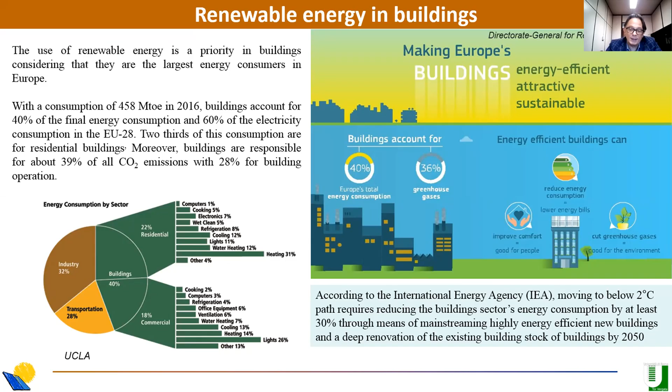So what is the idea? The idea is the following: we have buildings everywhere, more and more actually. The floor area used for buildings will increase at a steady pace in the next years. The idea is to create something active, a wall that could generate energy in the building, and then use that energy in the building itself.

So you also avoid the transport of energy and use the energy exactly in the place where you need it.

So, however, to do this, I mean, we need to... sorry, I need to move something here. Let me see if I can move something out. I cannot do. Let me see. Okay, maybe.

So anyway, there are several options to activate this process. I mean, of course, efficiency, color, stability are all important.

Transparency, if we want to use in glass facade, but also we need to motivate people to accept it. So we need to have a social acceptance of having a building element, an active building element. So also the norms, the rules should be changed, and this will also impact completely our societies. So it's not only a technological problem, but also it's a social problem.

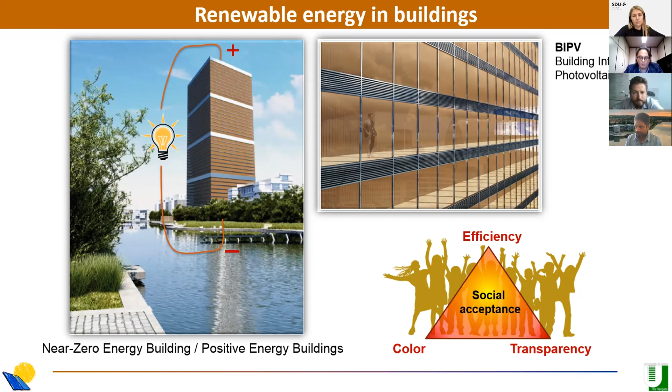Concerning photovoltaic technology for transparent photovoltaic, I will focus only on the transparent part of the building integration. Of course, you can integrate photovoltaics in buildings in different ways, also in the spandrel part, the opaque part of the building, or in the roof. I will only focus on the transparent part, which is the more advanced, more tricky, the more critical from the technological point of view. So there are several technologies to integrate photovoltaics in semi-transparent facade.

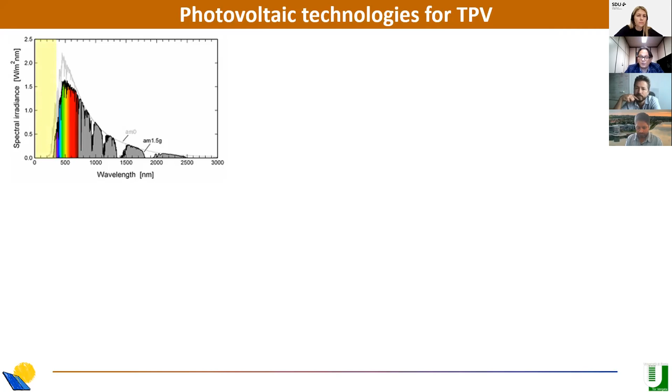For example, I show you the spectrum irradiance, the sun spectrum we receive on Earth. You can see that to make something which is transparent, but at the same time converts some light into energy, we can use, for example, the near UV part of the spectrum. So you have a near UV absorber. And in fact, there are already reports showing that you can use this part to make some cell with some efficiency and an average visual transmittance, AVT, of 70%, for example.

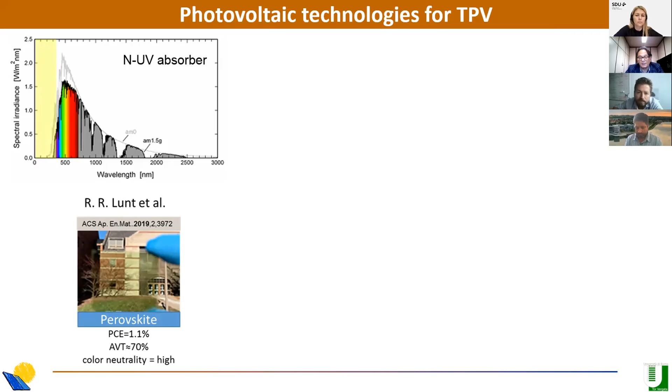Of course, you can do the opposite. You can use a near infrared absorber, and with that you can harvest energy in the infrared part, and there are several technologies that could do this. Of course, it's quite selective. Conventional semiconductor will absorb from infrared down to visible and UV. You need molecules, more or less, to have a selective absorption in the infrared only.

And for this reason, the two main technologies are dye solar cell and OPV, organic photovoltaics, both small molecule and polymers.

Now you can easily understand that you can combine both in a sort of tandem application, where you can absorb the UV part and the infrared part, and then harvest energy from both parts of the spectrum without touching or absorbing in the visible range.

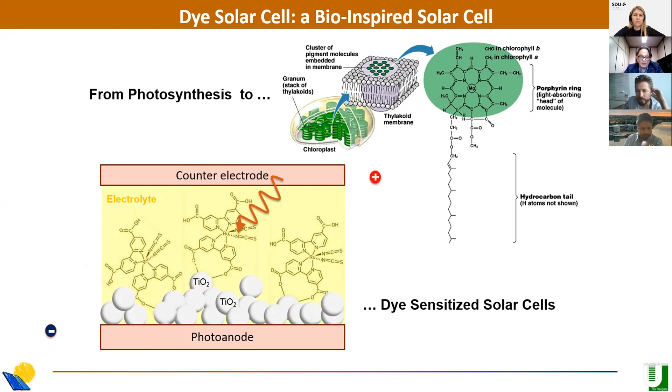So these results are from some years ago. There was an enormous effort and a breakthrough, I want to say, recently.

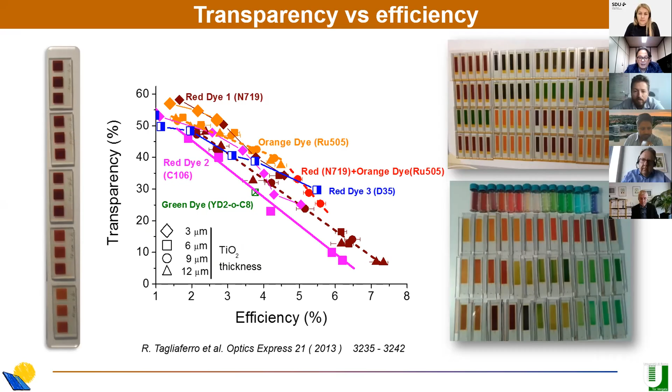This was made by the Fred Sauvage group, who were able to get almost more than 3% efficiency with a transparency in AVT exceeding 75%. So this was a very big breakthrough. The molecule was synthesized by Claudia Barolo in Turin, a near UV dye.

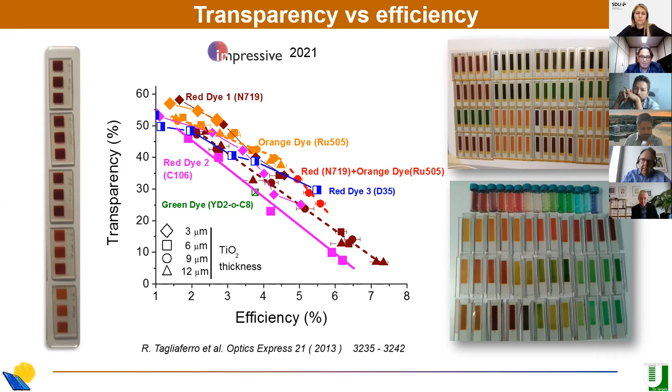Using also a very transparent electrolyte, they were able to get this result. So you see there is a continuous effort, a continuous innovation in the field, and this is pushing the ratio between transparency and efficiency. So at the very end, I believe in a few years we can move these numbers to higher efficiency, keeping the same transparency.

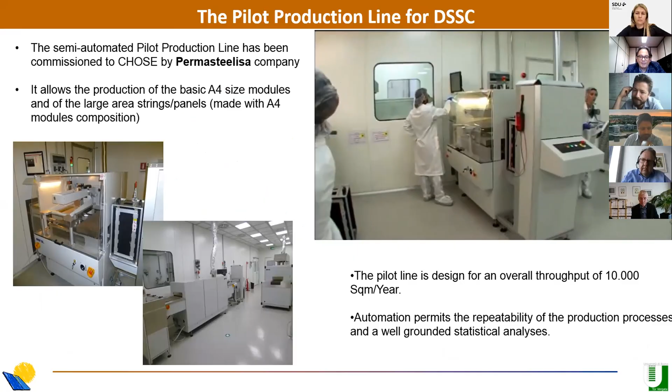So this technology is quite commercial, it could be exploited at the industrial level. Unfortunately it's still not commercial. But you see, this was an effort we did for a very big facade company called Permasteelisa. This is a semi-automated pilot line where modules could be fabricated more or less in an automatic way.

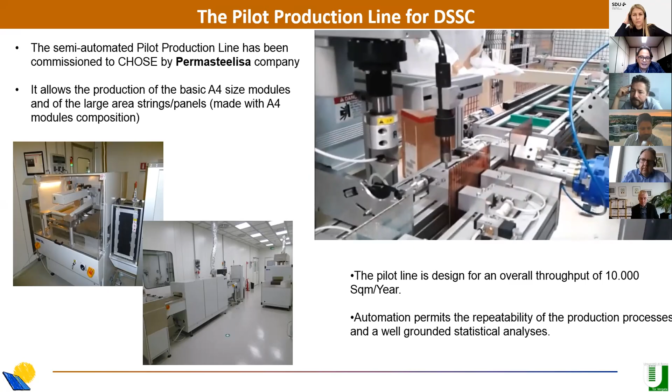You see here is the oven where you can sinter the titania. And then you see this is the final part of the assembly, and the robot that takes these modules and assembles them all together to make the final panel.

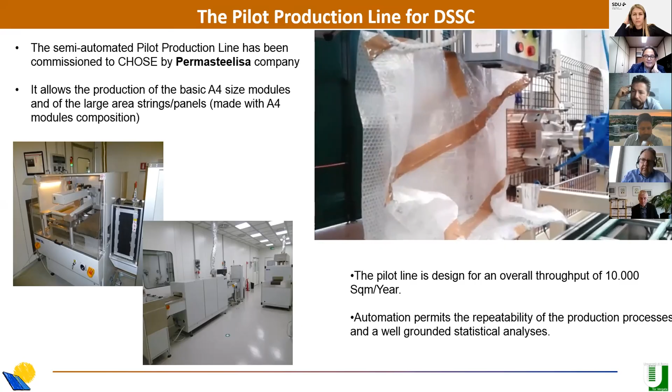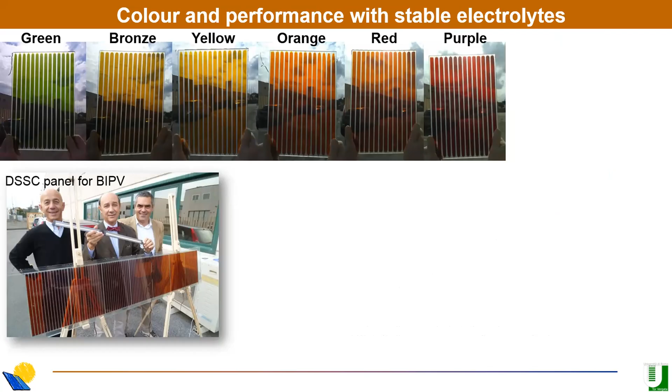This is more or less what you can get. It's not too transparent, but at that time we had some other milestones related to colors. You can change color more or less continuously from green to red. Still blue is a bit problematic. This is the typical value of efficiency, around 5.5% on the module level, and AVT around 30%.

Technology is quite rugged, robust. They can indeed sustain the IEC norm test. This, for example, is 85-degree thermal stress. It's not damp heat, but you can do also the damp heat test. And then you see you can keep the efficiency quite constant, even for 1,000 hours of stress. So even though the basic technology is a molecular technology, you can indeed stabilize this technology without a problem.

Of course, stabilization of the technology came after a big effort, an industrial effort made by more or less 20 people for 5 years. So it comes not for free, but it is doable.

The next step, actually, after the dye solar cell, was the introduction of perovskite, halide perovskite, and this was more or less motivated by the development made by the dye solar cell.

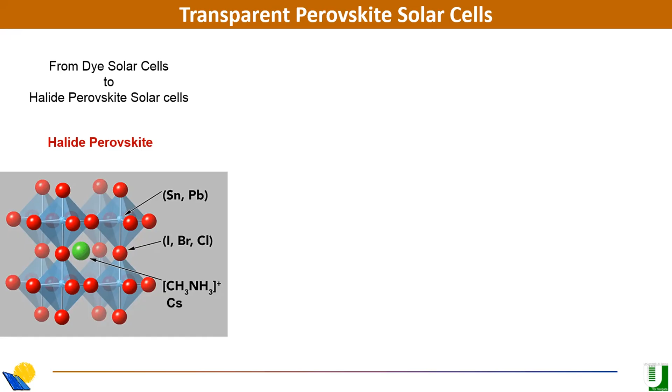Halide perovskite is a quite complex material, and you can see that you can change a lot of elements inside the crystal structure. One of the main elements is lead, which is sometimes problematic because it's lead. But then other elements, the halides or the other cations, can be changed to tune the properties of this material.

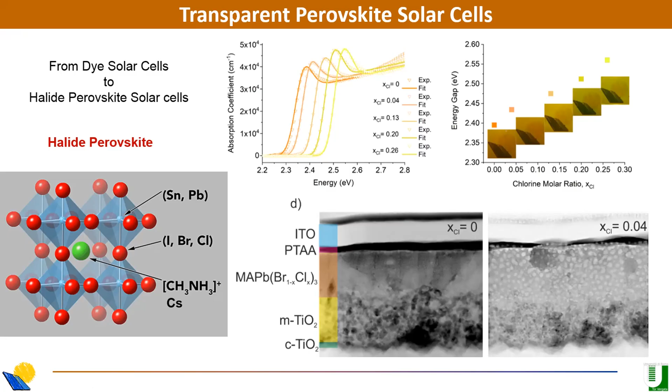So in the first plot, I show you the absorption coefficient as a function of the energy of the photon for different concentrations of chlorine. I'm now focusing on this kind of perovskite, methylammonium lead bromine chloride, because this kind of perovskite has a large gap for making a UV absorber. As you can see, changing the chlorine content, you can change the gap from 2.4 to almost 2.6 electron volt. So you are moving the gap toward blue or near UV.

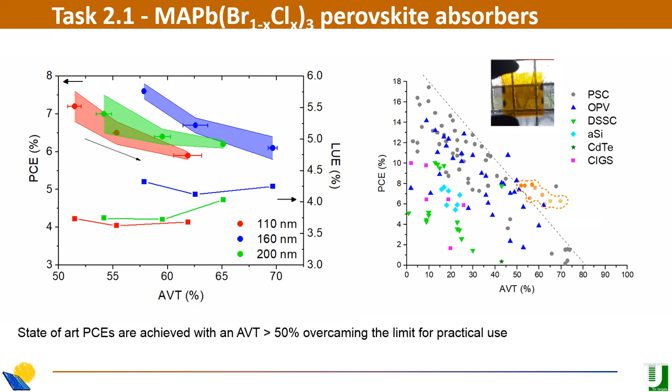This is the plot summarizing all the results published up to date in literature, showing efficiency and transparency. The results we recently obtained were in this range, quite overcoming the results published in literature so far. So it's a new strategy to get good transparency and at the same time good performance.

You can scale these up to large area. You can see here modules made by perovskite materials with different concentrations of chlorine, over a quite large area. And scaling up does not reduce too much the efficiency of the solar cell.

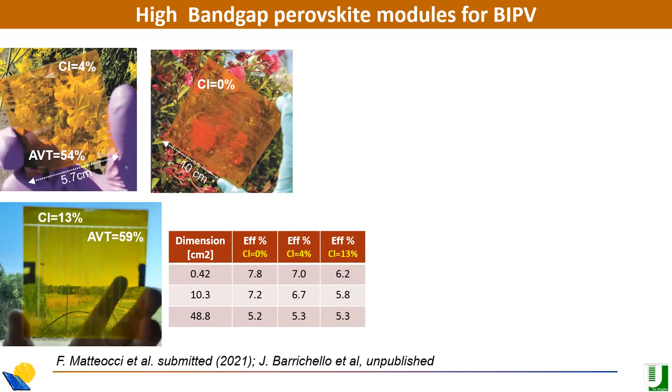For example, for the more transparent one, from a small area you get 6.2% efficiency. On larger area, you can get 5.3% efficiency with a transparency which is almost 60%.

You can also use blade coating, not typical laboratory deposition. This is a recent result for the CITYSOLAR project, that I will introduce in a moment.

The idea now is to move from single junction to multi-junction, because in this way we can improve the efficiency. In the single junction, we are limited by the Shockley-Queisser limit. But if we move to 2 junctions, 3 junctions, we can further improve the efficiency of the solar cell.

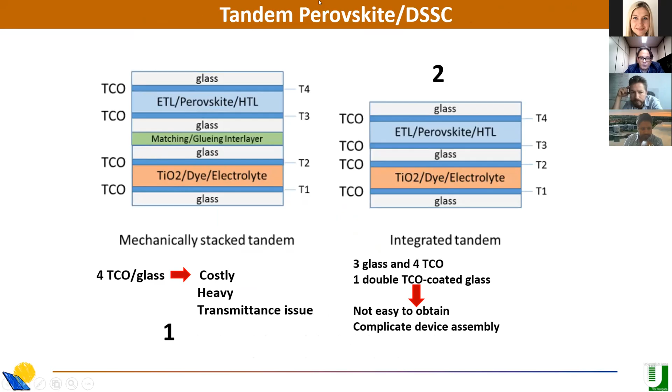So for this reason, we were considering a tandem: a top perovskite cell and a bottom, for example, dye solar cell, with different configurations, and also optimizing by reducing the number of interlayers to reduce the parasitic losses.

At the moment, we have just the first attempt for the dye solar cell perovskite tandem, which is the one on the right. But simulation can tell us what could be the final goal if we optimize the whole process and the cell. If we are able to get a perovskite solar cell with efficiency around 18%, with a transparency between 65 and 70%, we are not so far from this goal.

And if we are able to get a dye solar cell with an efficiency around 6%, with a transparency of 55% — at the moment this is the most critical part of the development, so it is not easy to get to 6% with 55% transparency.

So if we sum these two, then we can get a final tandem solar cell that has an efficiency close to 14% with 55% of transparency. This is quite interesting, very critical, very difficult to achieve, but not impossible.

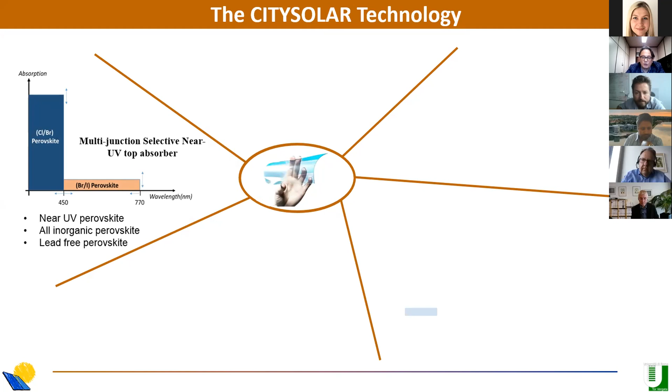We will use a near-UV perovskite absorber, which could also absorb a little bit in the visible range but with very low absorption, and a bottom near-infrared OPV absorber. We will also have light management.

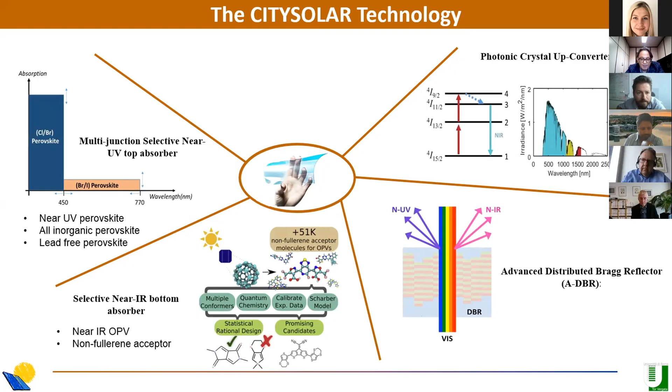Light management will be very important via DBR or up-conversion, and this will be mainly done by the Morten Group in SDU. We also have a new way to integrate the top cell, the top module, with the bottom modules, using the mold-back strategy.

So we set up multi-scale facilities for this. We will use automatic material processing made in Germany, at FAU, with the AMANDA platform. And also for characterization, we have multi-scale characterization.

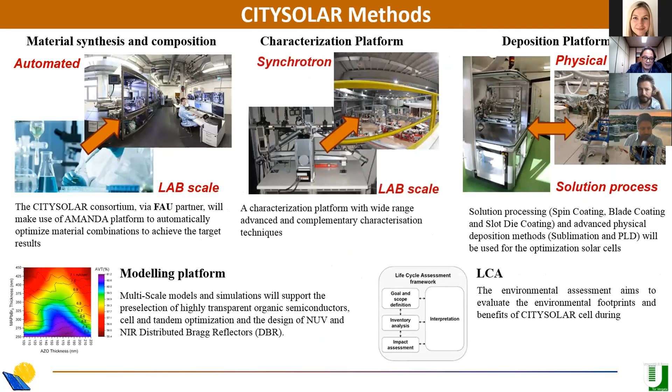I will not go too much into the details of the project, but you can see light management is very important, and as I will show you in a moment, this will make the difference with respect to other projects.

Light management will reflect part of the infrared radiation back to the cell, so we can absorb more and more of the infrared radiation. This is the setup Morten will actually use to realize this light management part of the cell, and as I said, this is the real further step we added to the project.

So development is under progress, and you'll need to check the results in a couple of years. But anyway, we did a very thorough simulation activity, changing the thickness of the OPV and perovskite layers, changing the configuration of the tandem, and so on and so forth.

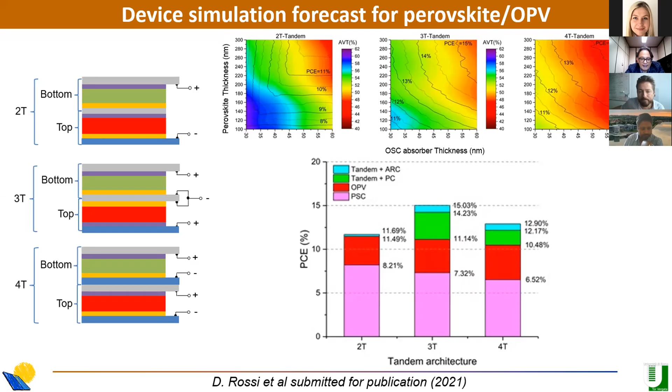And at the very end, having also some experimental data, the simulations were also tuned on experimental data, so 15% should be achievable. You can see that the photonic crystal, anti-reflection, so all the light management part, which is the green and blue part, are impacting very much the final efficiency of the solar cell.

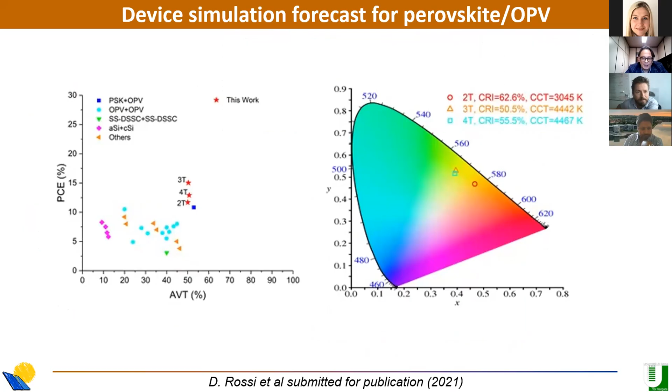So at the very end, these will be the results. We will really push further the state of the art for transparent photovoltaics. I hope, and I'm quite confident this will be achieved. So stay tuned, we will try to show it with a real demonstrator. So I could conclude now.

Building integration of photovoltaics, as I said, is an essential step toward green transition. New generation of materials and architecture permit us to create selective absorbers for transparent photovoltaics. Several technologies are available: dye solar cell, perovskite, polymeric solar cell. They need to combine together to exceed the Shockley-Queisser limit for transparent photovoltaics, creating a transparent photovoltaic with efficiency.

So also those who are quite reluctant to introduce this active element in the building will at the very end find an advantage to use photovoltaics. I would really like to thank Fabio Matteocci, who did a lot of experimental activity in the field of transparent photovoltaics in the CHOSE group in Rome, and also the two projects, Impressive and CITYSOLAR, that are funding all this effort. Thanks a lot.

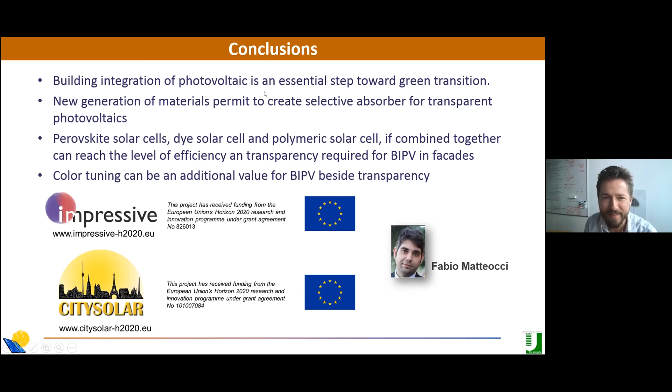Yes, thank you very much, Aldo. This is really an impressive project, I'm really looking forward to the outcome. I was especially impressed by you saying that you would have some color neutral solar cells. In which range do you think you will have the color neutrality? And at the end, you are also saying that color tuning can be an additional value. Sure, but does that not affect heavily the efficiency and other parameters of the solar cells? So how free are you really? Because I know the building integrators, if you talk to them, they tell you you should have blue solar cells because that's how these skyscrapers should look like. And especially blue seems to be complicated.

In the project, we gave some numbers, some KPIs for our color rendering index. That should be around these points, but we were a bit vague on this. We just called it general color neutrality without giving too many numbers, because we know this will be the most difficult part - to give all three numbers: transparency, efficiency, and color rendering number. So we give some numbers, but we are quite vague.

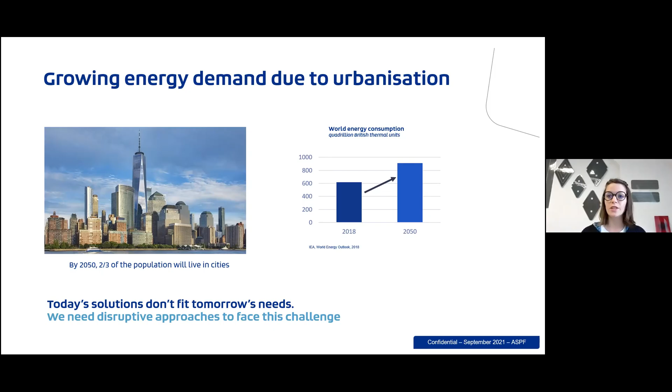As previously introduced, we're all aware the energy demand worldwide is increasing - no surprise. But we also have to take into account that in the future, the population will mainly live in cities, meaning buildings, a high density of population in a small area, development of urban infrastructure like public lighting, and growing electromobility. Tomorrow's society picture shows high density at one central point with high energy demand, but no chance to bring power plants there. We won't put a solar farm or wind turbines in the city. We might put some traditional solar cells on rooftops, but buildings are built more in height than width, so energy generation is limited. This means the solutions we have today are not suitable for all the needs we'll have tomorrow.

So that's why we need to develop more technologies which fit those needs. That's what we're doing at Armor Solar Power Films with our product called ASCA technology. Our aim is to energize all kinds of surfaces, to be used anywhere and at any time.

A few words first about the Armor Group. It's a French company implemented worldwide, and today the world leader in thermotransfer films - printing of barcodes. You might think this has nothing to do with OPV, but you'll see a printing company is perfectly suitable for OPV. The company is of course in industrial printing, but has also developed other branches in new technologies and renewable energies, such as film batteries, 3D printing, and OPV manufacturing.

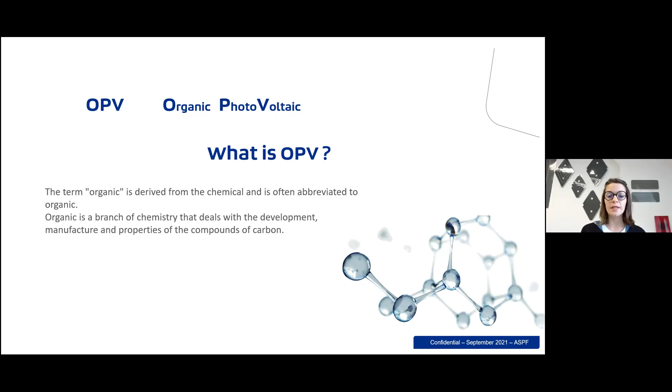What are OPV? OPV stands for organic photovoltaics - photovoltaics we all know, and organic refers mainly to the family of chemical components used in the products, which are mainly carbon-based. What we're doing is printing the solar cells, which relates to the nature of our mother company, and we print thanks to a roll-to-roll principle.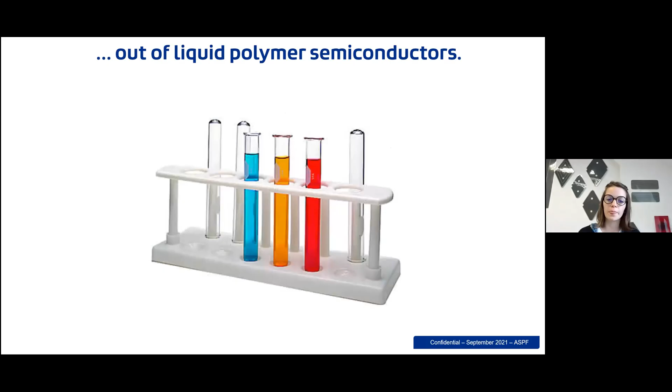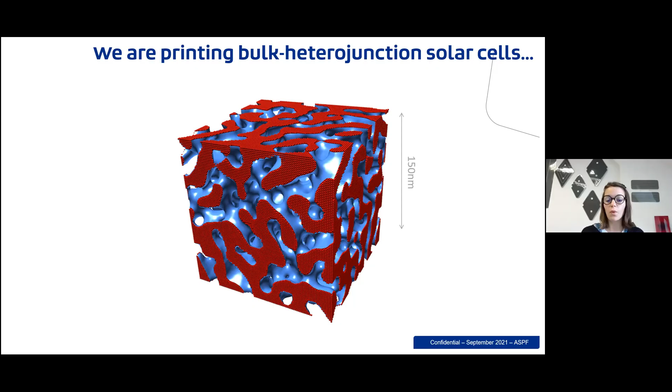So it's a pretty easy process - we work at ambient temperature, ambient atmosphere, ambient pressure, an easy and not too energy-consuming process. We're also not using any vapor deposition process - it's screen printing. What we print is liquid polymer semiconductors, the organic component introduced before, and we print a bulk heterojunction solar cell. What's important here is not the word, but the thickness - we're printing layers only a couple hundred nanometers thick, giving us a really thin solar panel. That's why they're also called thin film solar panels.

OPV has certain advantages. They are transparent, they can be colored, and with OPV we are doing a lot of blue color. They are flexible, and they are also super lightweight due to their structure.

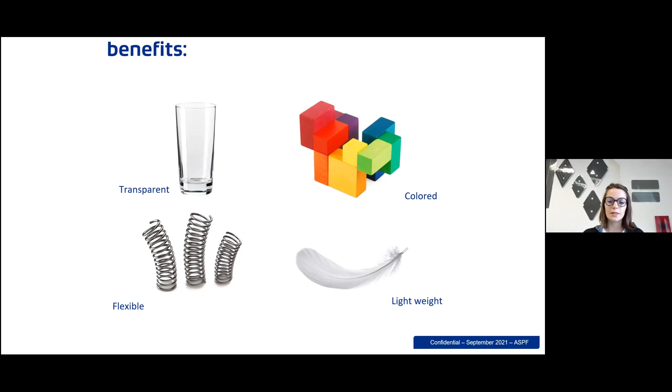However, this is not enough. This is just a technology. It's not enough to implement solar technology in our everyday life. We are missing something for social acceptance, because this is just a technology, not a full product. So what we are doing in order to bring solar panels into our everyday life is using designable modules.

Thanks to the printing process, we can make any kind of shapes and forms for the modules, and we can tune the color. This means we can play a lot with the aesthetics of the solar module, giving us good leverage for social acceptance. If we think about a glass facade, no one really wants one that doesn't look good or isn't semi-transparent. But whenever we combine it with design and make the glass facade a piece of art, suddenly the interest is much higher to introduce these solar cells.

But in order to implement those solar cells on, for example, a glass facade, it also needs to be integrable. Integrable has several meanings. It can mean integration into a material—today we're capable of integrating solar cells onto or into any kind of material, such as glass, polycarbonate, or textile applications. We can work with adhesive, and integrate them into processes with plastics and so on.

We're also working a lot on integration of the system, because whenever a module needs to be nicely integrated, to fit into a project or blend into its environment, we can't have a lot of cabling visible everywhere. So we're putting a lot of effort into making the cabling as transparent and non-seeable as possible.

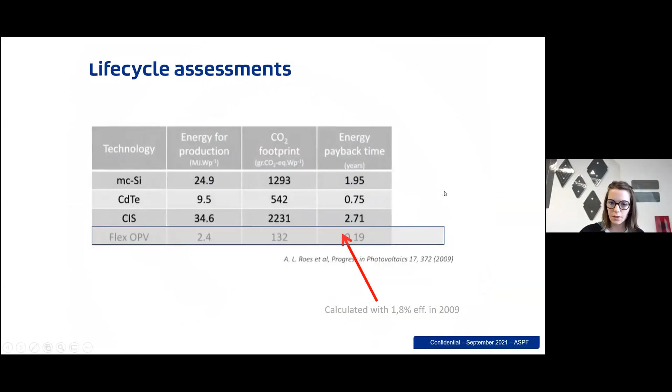This wouldn't make sense if the technology weren't sustainable. The OPV materials are made without any toxic materials, and they're also recyclable. Their life cycle is also important because their energy payback time is only a couple of weeks, whereas classical silicon cells take about a couple of years.

This is also shown by the fact that we received some prizes, the last one being the German Sustainability Award in 2020, which shows there is indeed huge interest in a sustainable future for such technologies.

Now that we've talked a lot about what OPV is, I think the best way is to show some examples of applications, to show how we are bringing those modules into surfaces and different applications. As mentioned, we see OPV more as a component, so we can work in several fields - BIPV with the structure mentioned before, but also mobility or sensors. For sensor applications, I'm now going to present a few of our realizations.

The last one we did was Rooms, which is a platform and a product which manages a meeting room, and which can now be powered only thanks to an OPV module. Usually the interest in sensors is to reduce the need for battery, by removing the battery from the system or by enlarging the lifetime of the battery.

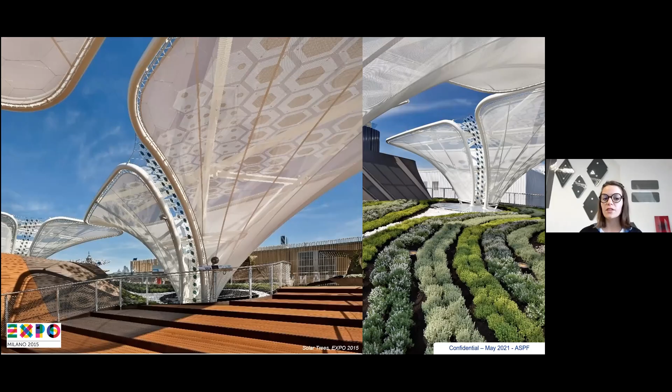This comes back to the fact that we also work on the system, and the modules we're working on the interconnections, so that the aesthetic of a project is not ruined by the cabling. As those trees were pretty nice, they've also been replanted in Germany. We reworked the integration so the trees can last 10, 20 years more without having any problems. This picture, even though it looks like a rendering, is an actual picture from the installation, which is in Darmstadt.

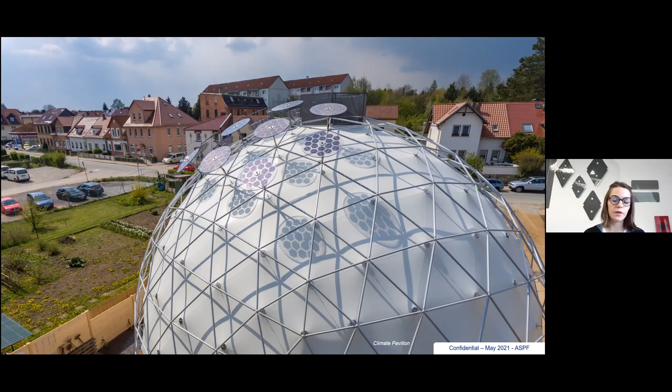A Climate Pavilion that we realized was also an installation in Germany, and this was a temporary installation. The OPVs here were the only solar technology we could have which could reach their energy payback time by the time of the installation. So this shows how quickly we can produce the energy needed for its creation—in the end, the OPVs had a positive impact in terms of energy. For this kind of umbrella, we used thicker PC laminations because the structure could not support the weight of glass.

A project we did out of Europe, this time in Africa, in Addis Ababa for the African Union. Most of the time when talking about selling projects, we always hear that OPV is super expensive—not always. We got this project because of the price. The reason is simple: if you want to integrate solar modules laminated into glass under such a glass rooftop at such a height, the installation costs are really high. This is shown by the fact that the complete cost of the project—OPV manufacturing, installation, system—was lower than the installation cost for glass panels with silicon cells inside. So when talking about cost, it's always about the complete system, not only a few parts of it.

We also did some more artistic installations, such as this biennale in Seoul, where we combined OLED and OPV, all installed on local materials. The complete installation is made onto bamboo sticks, where the OPV generate energy to allow the lighting of the OLEDs during the nights.

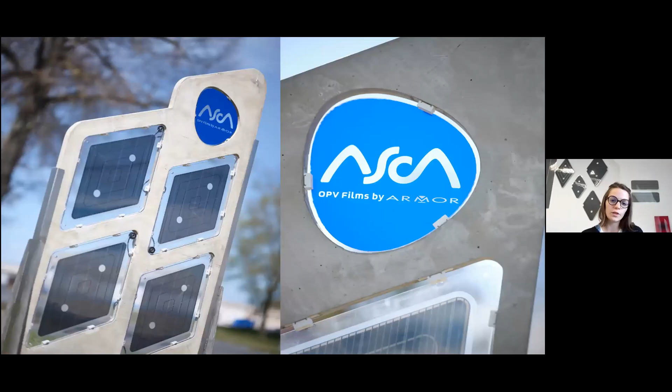Talking about more opaque surfaces, we're also working with concrete, such as a thermal insulating facade, or OPV integration with freeform concrete, where we can still keep the semi-transparency of the OPV if we want, by combining it with a steel structure, in any kind of usage.

Some of our more recent projects, which really highlight the fact that OPV modules can be integrated anywhere and adapted to the product, are these balcony balustrades. This is a new building whose aim was to have a positive energy coefficient. On the rooftop we already have a complete solar rooftop, but this was not enough, so they had to use the facades to generate energy. Where to use the facade? On the glass balustrades—not only to generate energy, but also because the architect wished to have glass balustrades while keeping the aesthetical unity of the building.

Usually when you see a building with glass balustrades, people want to keep their privacy in their flats—one neighbor spreads some plants, another some textiles, another bamboo sticks, and you completely lose the aesthetical cohesion of the building. Whereas if you use balustrades like these with OPVs inside, you keep the unity because all balustrades are the same. You keep your privacy because people cannot look through, and you keep the light because the modules are still semi-transparent—so when you're on the balcony, you can still have light.

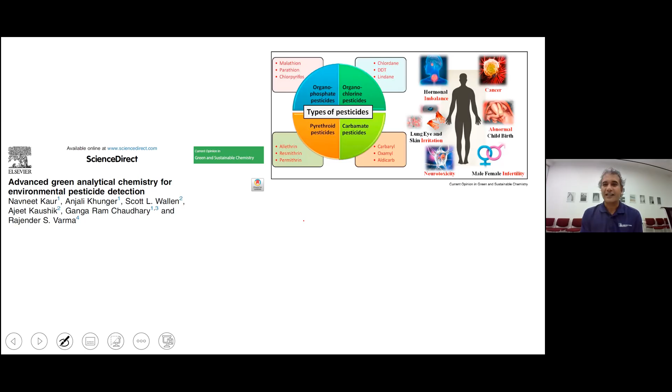So in this direction, we have projected the need of green chemistry, because every day we deal with food and water a lot. Food is getting contaminated because of fertilizers and pesticides, and we are unable to control this. At the same time, water is also a very important factor of our life, which comes from natural resources. We process it, make it contaminated, then this goes to the ecosystem, and this affects our food cycle.

And also, not everyone has accessibility to pure water. Some part of the population of the world is every day drinking contaminated water. They cannot afford clean water. So how can we solve this problem? This is a very serious issue.

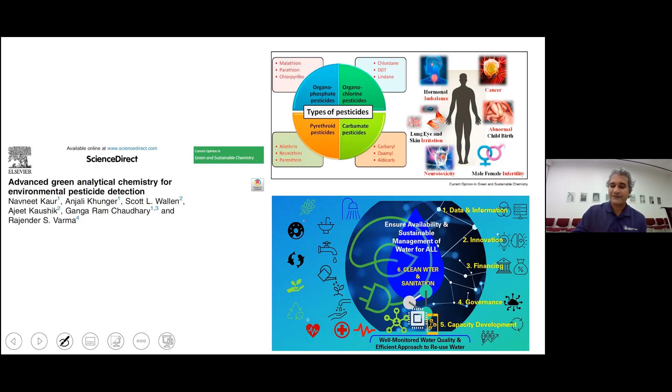So today I will keep my focus towards water aspects, and we have seen that metal oxides can be useful for water quality assessment and water quality management, because metal oxides are, of course, nanostructures. They can be synthesized using various ways, and they can be tuned. Their properties can be controlled.

The surface can be controlled. The size, shape can be controlled. But the only issue is, is this safe to make metal oxide nanoparticles? Sometimes no, and sometimes yes.

So my focus, or the focus of my team, is to explore that side. If we have safe metal oxide of desired surface functionality and desired catalytic property, or their stimulation-responsive nanosystem, they are safe, biologically accepted, do not affect our cellular system, can even be digested easily, that will solve the problem. And then these nanoparticles can be part of technology where we can introduce green chemistry, green technology.

In fact, we can develop green analytical approaches. So this is also the focus of our ongoing research. I think I'm already talking a lot, so let me wrap this up.

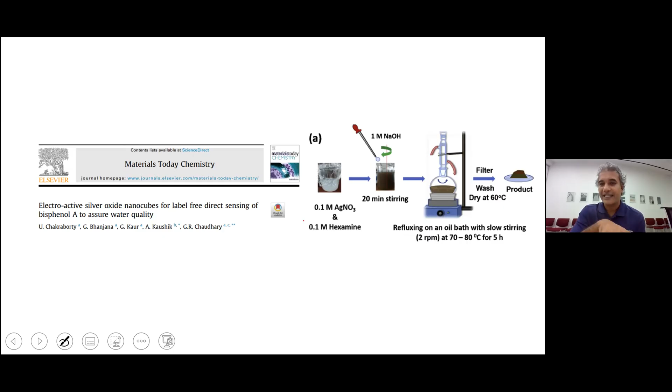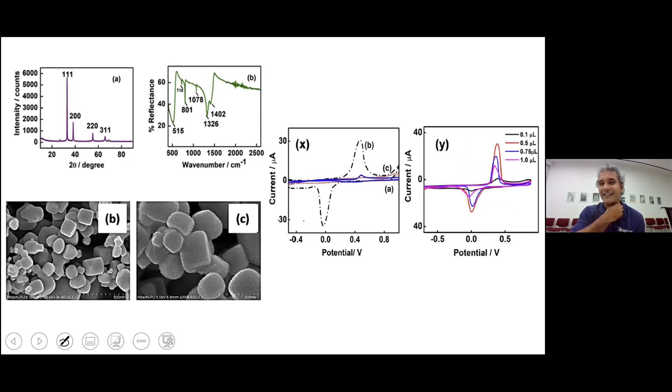In this direction, we have first silver oxide cube-looking nanosystems, which were synthesized in the lab using a very simple co-precipitation method. It's a very less time-taking reaction, and we have characterized these nanoparticles using analytical tools. These silver oxide nanoparticles amplify signal in a very impressive manner.

And not only did we characterize them, we detected BPA, which is a serious problem in our plastic manufacturing, and that BPA also causes cancer. So we detected BPA using these silver oxide nanoparticles, and we made this sensor in a very cost-effective manner.

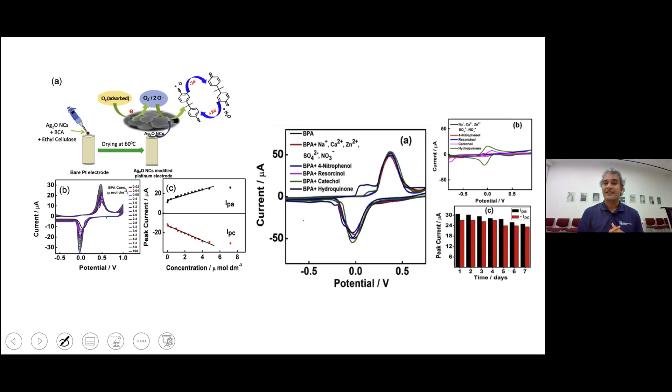We just used a simple platinum electrode, made a film of the silver oxide nanoparticles, dipped the electrode in water, and detected whether BPA is there or not. Not only did we use this fabricated sample, we tested the selectivity of this sample with reference to different ions and different interferents. We got a very selective response.

So in this series, we made another system, which is a nanocomposite, because we would like to improve the performance of silver oxide and also improve its stability. So we need a photocatalytic material so that we can also improve the functionality of silver oxide in a different manner. The first focus is, let's use zinc oxide.

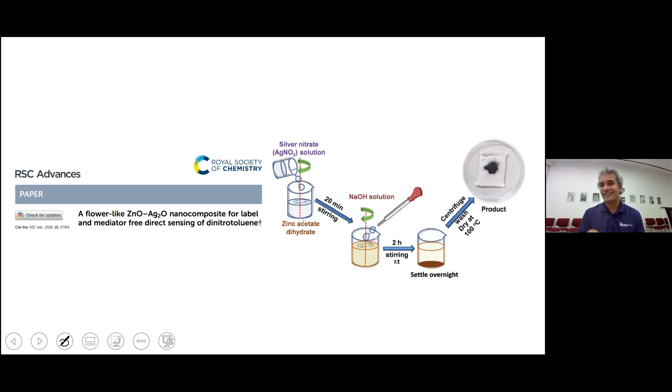And over there, we detect dinitrotoluene. Again, this is a very simple process, beaker-based synthesis in the lab. No heavy stuff, no high temperature calcination, no many days of synthesis. And we characterized them using analytical tools.

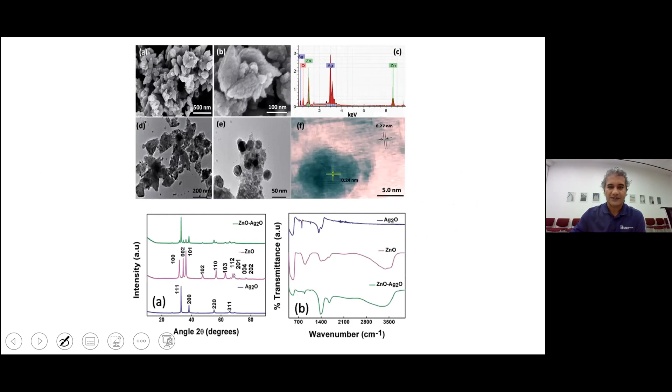Let me go fast because of lack of time. We also detected dinitrotoluene at a very, very low level. This pollutant is very serious to our health system. And this sensor is not going to cost more than, I would say, less than 1 penny.

According to Indian to US currency. This testing is less than 10 minutes, costs 1 penny, and we can detect whether my water has dinitrotoluene or not.

Again, the testing is validated using interference, and we do not see any effect of interference. Of course, there is reasoning behind selecting these materials, but I don't want to go into the detail of this scientific part.

So this work is very much close to my heart. We make the same nano composites, and this nano composite was made in the lab using a beaker-based approach. No toxic solvent was used. It is water-based synthesis, and this silver zinc oxide composite first detects 4-nitrophenol, and at the same time, it is a very good catalytic material that also degrades 4-nitrophenol and methylene blue.

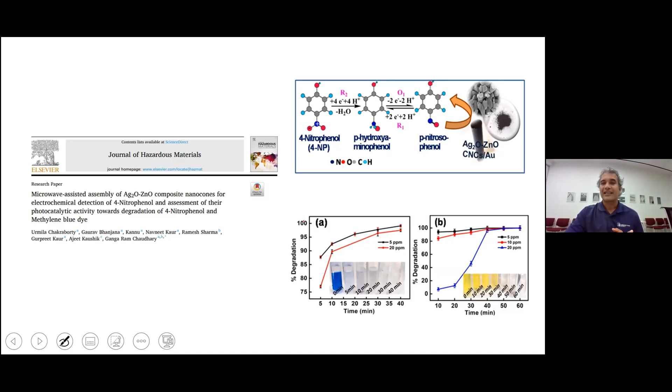These testing were validated and optimized with reference to well-known interference. We use different water sources like river, hand pump, and sewage water. We also made artificial samples to test unknown concentration, and we did ICP-MS studies to validate the findings of the sensors. Its photocatalytic properties were tested against methylene blue and 4-nitrophenol. We see that over time, 100% of the pollutant was degraded as we exposed light on it.

So, one of the very important points, maybe I'll take one more minute here, is air quality. I'm more worried about indoor air quality. We talk a lot about pollution, but for outdoor pollution we are not aware enough to understand the side effects of indoor air pollution. We have a lot of VOCs coming from furniture and cooking. We have microorganisms, mold, bacteria, and viruses inside our homes.

Recently it has been proven that coronavirus spread indoor through the droplet method. The droplets, which are very small in size, sit on particulates higher than 2.5 microns, and they can be inhaled by people. If we think about the early stage, coronavirus spread very rapidly in hospitals. It was because of their air circulation system. People were sneezing in the hospital, and these micro droplets came into contact with airflow and were inhaled by a lot of people.

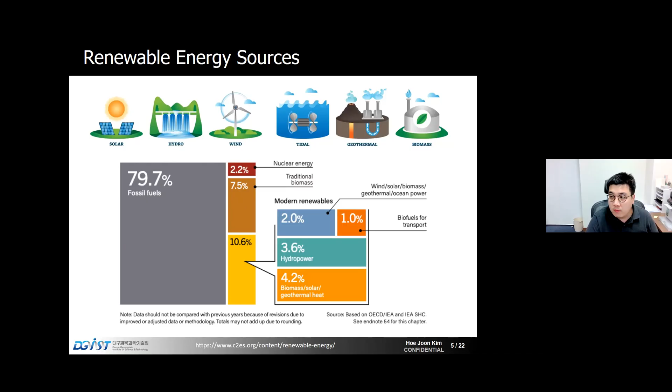If I talk more about the recent arising technologies for carbon neutrality, people are trying to develop more powerful, rapidly charging, and eco-friendly batteries. There is also a very large business sector growing in battery recycling, hydrogen or fuel cell technology, and solar or wind power is also very promising, already making a huge economic impact.

There is also this interesting field called energy harvesting. If you are sitting in your apartment or office, there is this light, there is this flow of air, there is the beating of your heart, and maybe you are shaking your legs - all these energies are happening in the form of mechanical, optical, thermal, or even magnetic.

And people are trying to capture these waste energies and convert them into meaningful electrical energy for following applications, such as low power electronics or wearable devices.

Also, people are trying to integrate this harvesting technology for extreme environment monitoring, where people cannot really reach. So batteries cannot be replaced, or maintenance of solar panels is not possible in these cases. So people are trying to install these energy harvesting based sensor networks in these environments.

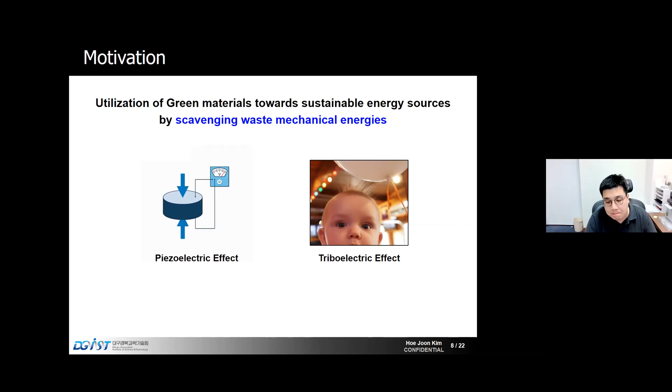So what do we use in our group? Obviously our group uses the piezoelectric nanogenerator and also the triboelectric generator. For materials, we focus on using green materials, or at least biocompatible or eco-friendly materials, such as lead-free perovskites for both piezo and tribo devices.

For piezo, we also work on bio-wastes such as cellulose of plants. We also work on biocompatible flexible composites such as PVDF, and some piezoelectric powders or composites, or both. For the triboelectric generator, we use metal organic frameworks or laboratory waste, and we try many different materials, because in tribo people are still trying to discover good combinations of materials, so we are exploring many possible materials.

Our fabrication approach is definitely not as safe as what Professor Kaushik introduced before, but we use additive manufacturing, mechanochemical methods using either ball milling or even a kitchen grinder. We also do room temperature solution-based methods or high temperature calcination methods, depending on what type of material we are using.

So our student just goes to grocery stores, buys some fabrics or rubber, maybe finds some good useful trash in a trash can, or goes to the lab, because there's always something no one knows what it is lying around in the lab.

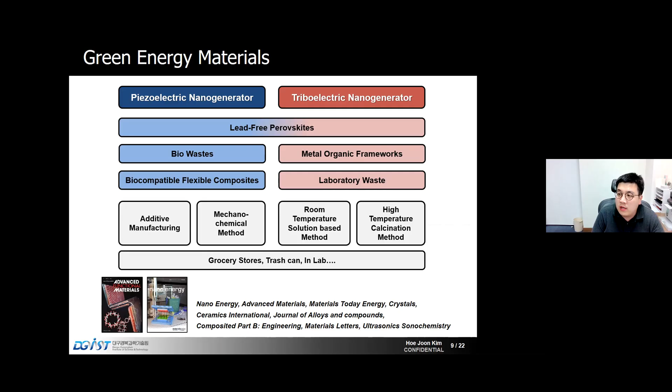The first thing I want to share is piezoelectric materials in nature. As I said, the piezoelectric effect is the generation of electrical energy due to the change in electrical polarization when you apply stress to a certain material. This effect is maximized in highly crystalline structures, because such materials are highly ordered and have directed electrical polarizations. Well-known piezoelectric materials are quartz or ceramic-based.

But people have also found that there are many biological parts inside our body — muscles, bones, DNA, or even some tissues — that also have crystalline or ordered structures, which generate a very low amount of piezoelectric effect.

There has also been a large amount of research in India and China trying to utilize this piezoelectric effect in plants such as bamboo, sugarcane, coconut, or even leaves, because if you look into the cellulose structure in plants, they consist of cellulose fibers but also crystalline regions with highly ordered electrical polarization. So even though plants are really soft, if you look into it, there's a crystalline rigid part which is in charge of the piezoelectric effect.

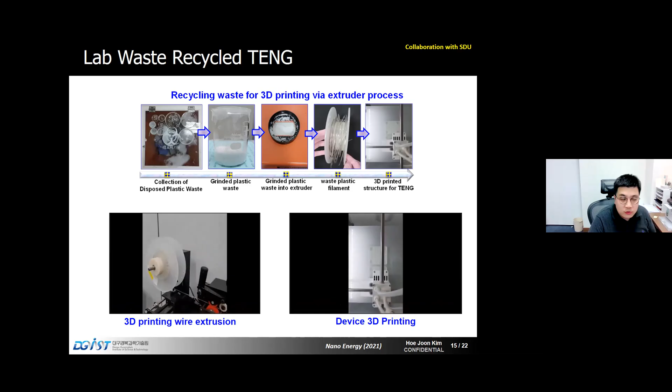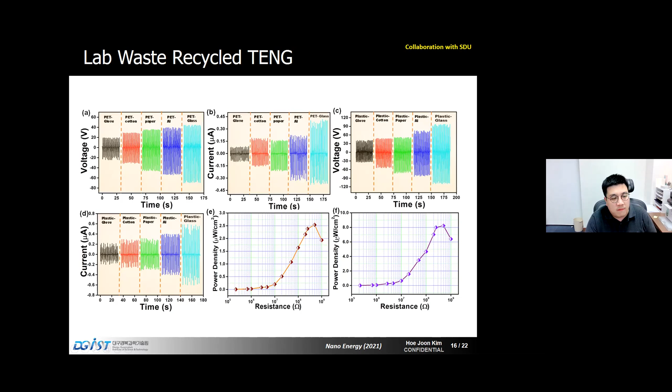Many people are trying to recycle polymers, even ceramic powders, and use them for additive manufacturing. So we compared a lot of different materials such as glove, cotton, paper, aluminum, and glass. Depending on the material combination, we were able to get different outputs, in this case a few microwatts per centimeter square.

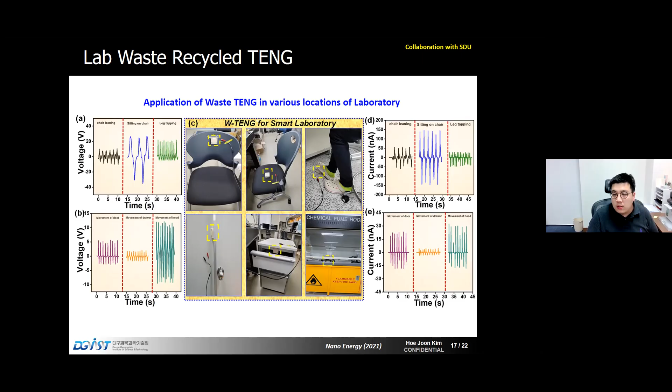Again, this may not be sufficient, but they can be used for event detection. We can put them in different locations, in the lab, in a chair, on your shoe, on a door, and whenever you open the door or sit on the chair, it'll generate a meaningful signal. So it can be used for intruder detection, or we can just collect the energy from walking. That was the overall concept.

To showcase the use of our device in actual low power electronics, we built a very simple rectifier and capacitor based circuit to charge the capacitor using this device. And we use the stored energy to power the human tracking device.

One of our students wore this as a necklace, and she was running and walking around the campus. What we did was collect this energy with the linear motor, and then we can turn on the tracker right there. Then using the cell phone app, we were able to detect the exact location, which was in our building.

Of course, we were only able to run this tracker for about a few tenths of a second, but it was a good demonstration that we can actually use this for a meaningful approach.

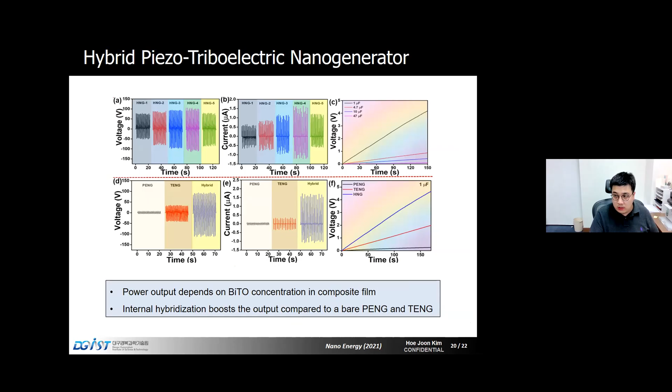We also were able to charge the commercial capacitor. So we built this simple golf ball type device. Our original idea was to build a device with two nanogenerators inside this golf ball, and put it in a swimming pool or a bath to artificially make waves and collect energy from the natural oscillation. But maybe we should have gone to a seashore instead, we didn't have time.

So we just moved this thing using the linear motor, and whenever you run the motor, this golf ball moves with the inertia and can collect the energy. Depending on the acceleration or speed, we are able to collect a large amount of voltage, in the order of hundreds, or 200s, and also a meaningful amount of current.

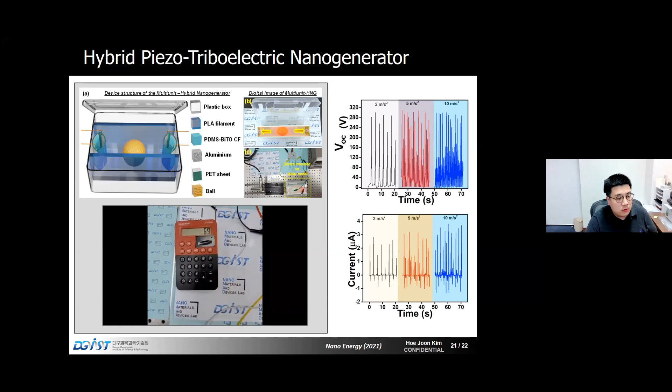So okay, I think I'm right on time.

I just wanted to share this concept of energy harvesting using nanogenerators. Of course, there's a long way to go to replace batteries, but we don't really have to replace existing energy solutions, because with the advancement of semiconductors, MEMS and sensor technology, all these sensor nodes or devices, including the IC sensor node and wireless communication, require very minimal power - everything can be packaged in the milliwatt regime. So I think our power source can be used in that direction, but also for meaningful self-powered sensing and event detection.

All this work was primarily guided by Sugato Hajra and Manisha Sahu in my lab. Also Hangyam Kim and KT joined in this team. These are the four people working on these materials and nano devices.

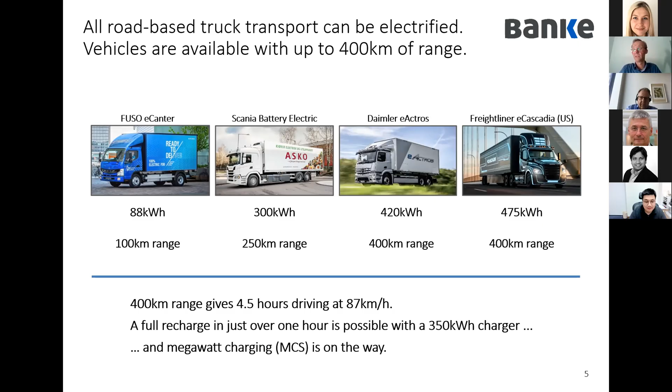We also see that it's possible to charge these batteries faster and faster. And in trucks, it's actually not even that necessary. I mean, a standard supercharger for a Tesla, which is 350 kilowatt, can put a lot of miles into a truck battery in a short period of time. And the new standard megawatt charging, which is on the way, will be able to charge these batteries in 30 minutes, which is about the time that a driver needs to rest anyway in between stops. So this is why I think that this is where the world will turn, and that's of course the opportunity.

The race is over. You can forget about biofuels, you can forget about hydrogen or even electrical fuels, and it all comes down to efficiency. There's only a third of the energy being used in a battery electric vehicle, well-to-wheel, compared to any other alternative. And this simply makes the case. There's no reason to discuss anything else. If this is possible, that's what we have to do, because our green hydrogen can be better used elsewhere in the energy system than to be wasted in an inefficient truck.

That's the whole issue. Then comes the question about infrastructure and grid capacity and so on. And also there, in my opinion—and I have to admit that's probably where I'm a little bit low on knowledge—but as far as I can gather, the grid capacity is not a major issue. Further, there's no technology development required. We are there, all the technology is ready. It's a matter of getting the supply chains built up. It's a matter of putting the products together. It's a matter of solving the tasks. It's not a matter of new groundbreaking stuff that has to be developed.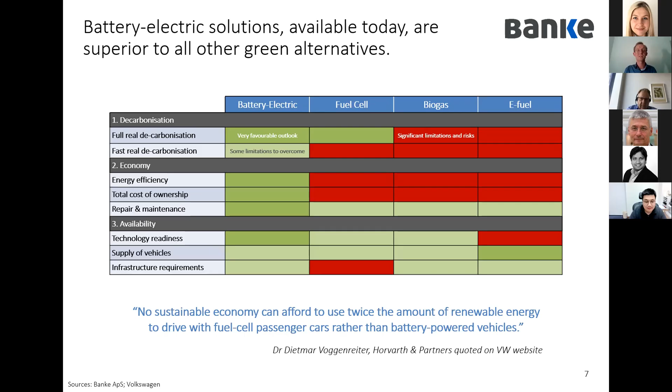These are all things we cannot achieve with fuel cell, biogas, and e-fuels. Now they have other advantages, and I think we will see them in the coming years. We have to leave a little space open to them, because if we look at e-fuels and the supply of vehicles, the availability, they are more often than not drop-in. We can use them right now, which is a huge advantage. The same goes to a large extent with biogas, maybe not so much with fuel cell, and battery electric vehicles is certainly lacking.

If we look at infrastructure requirements though, for battery electric, on the big lines, the availability of power where we need to charge these vehicles is there. What we need is the last 100 meters and the charge point. In the Danish infrastructure, that's something the hauler or fleet owner has to pay for himself, and that's probably an area we should look at. But again, it's a task which can be overcome, and not a huge financial burden.

However, if we look at fuel cell and hydrogen as a fuel, that is, in my opinion, a completely impossible task to distribute hydrogen for truck use. If you have to distribute it in lorries, you'll have to use 25 times as many lorries as you use today to transport diesel to the gas station. And you need the same kind of web, maybe even more finely woven, of tanking points, because the range of these fuel cell vehicles will not be impressive. So distribution of hydrogen in its pure form for road transport, I simply don't see it.

Biogas, again, not a huge and expensive undertaking, but there simply isn't enough biogas to play any significant role.

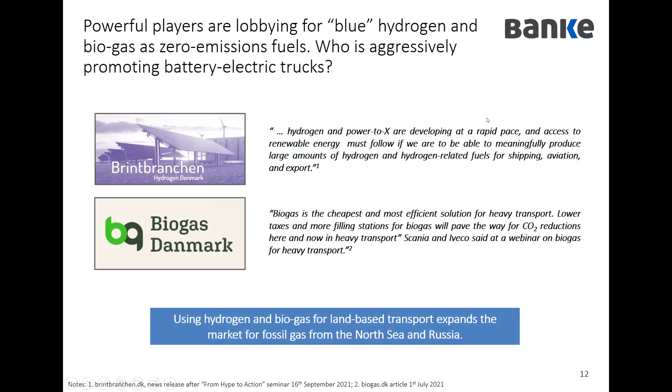So that's fundamentally it. So let's summarize. I argue all road-based truck transport can and should be electrified.

Vehicles need to cover about 400 kilometers on a single charge and charge fast. The race is over. There is no competition to these. The battery electric trucks will prevail. There is an opportunity for a new OEM if he can get financed. And there's also opportunities for people to come up with business models for charging these trucks. I think that more aggressive lobbying would support a rapid adoption of battery electric solutions.

Thanks a lot, Rasmus, for your very interesting talk about electrification of trucks and its challenges and possibilities. And I completely share your view that most probably the electric truck will come and the hydrogen-driven truck will not. One reason for me is that the energy density and power density of batteries will increase in the near future, and this will also dramatically extend the range.

But nevertheless, we need a charging system. We have a nice charging system already established for private cars, but we need it, as you said, also for trucks. And this is a political issue. I think when we now see changes in governments right now in Germany, as you might notice, there will most probably also be a push in that direction. So this will help you, I believe, in establishing your business.

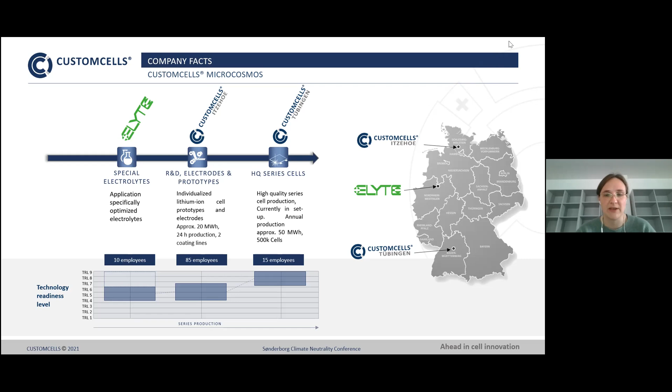So we are developing application-specific battery cells for a reason: depending on the application, lithium-ion batteries demand different properties. Sometimes you need high energy density, sometimes high rate capability. Sometimes batteries have to be very reliable because they support life-supporting systems. Other times there needs to be high temperature, low temperature, or safety tolerance. If all those specifications could go into one cell, then we would not have a business here. But unfortunately, that's not the case, so you cannot put every parameter in one cell.

I want to show you why that is and what we do to customize cells according to a certain specification and application.

Lithium-ion batteries are built up of some materials and concepts. First, there is an anode and cathode material which provide lithium ions. The cathode material consists of a material that contains lithium ions, and the anode material is able to store these lithium ions.

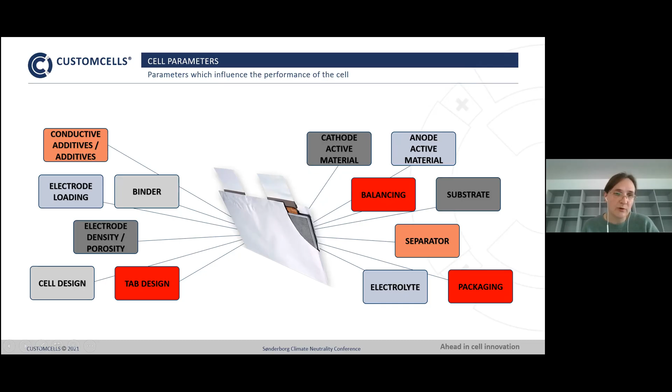Furthermore, there are some concepts that go into this design of a battery: the overall cell design, so what shape it has, how it looks, but also things like balancing between anode and cathode. The anode is always not only physically larger, but also a little bit larger from a capacity standpoint, to make sure every lithium ion can be incorporated into the anode. Furthermore, concepts like electrode loading, so how thick the layer of active material is on the substrate, and electrode density and porosity, will have a high influence on the characteristics of the battery cell.

Everything started with the LCO, the lithium cobalt oxide, but all of us know that cobalt is not only a rare material, but also is sometimes gained by non-ethical or ethically problematic working conditions.

Therefore, the recent trend is to use a material called NMC or NCM. It really depends on the overall buildup of the material. It is the same building block as the LCO, a lithium cobalt oxide, but the cobalt is diluted with other materials, other metals, nickel and manganese. This is done for several reasons. First, it is more stabilized than the LCO. The expensive cobalt is diluted with cheaper materials like manganese and nickel.

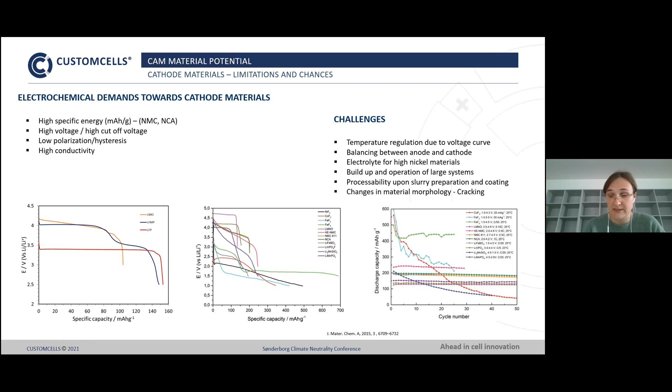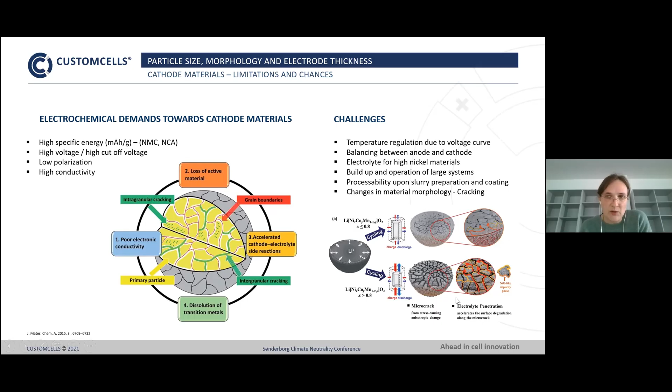The higher the nickel content, the more movement you have in cathode materials, for example, which will lead to cracking of materials and faster aging. Therefore materials with high nickel content need to be produced in very dry atmospheres, because they are sensitive towards water, and they need special surface treatment or crystal treatment to prevent this cracking upon cycling, because this will lead to faster aging and inhomogeneous charging and discharging.

On the anode side, on the other hand, silicon, which is a trend, shows a very high volume change upon charging and discharging. This leads to a so-called SEI, the solid electrolyte interphase, that is formed upon formation and prevents the solvent molecules from intercalating into the material.

Because the silicon has such a high volume expansion, this SEI will break, and new electrolyte molecules can react with the now bare silicon surface and build a new SEI. Upon discharging, the particle will shrink again, and the SEI will be on top of this layer. Over the cycling of the cell, the impedance, the inner resistance of the cell, will increase, because this SEI grows more and more.

This can be prevented by special electrolytes and/or modification of materials, for example nanostructurizing materials, or special structures, which is shown on the next page.

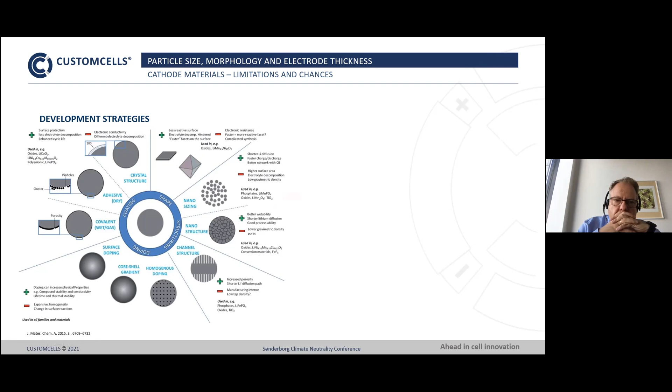It is always most important that material developers and customers who use the cells talk to each other, because it is not helpful for a material developer to develop a special treatment that is, for example, too expensive for a customer to use. So there needs to be interaction between the two. Also, the customers or users of the battery cells need to know the theoretical and physical or chemical limitations of materials, so this interchange between material developers, cell developers, and users of cells always needs to be maintained.

So I'm not sure how much time I have left. I think there was an issue with the last speaker today, so we have a little bit more time. Your talk is really very interesting, so you have your time, Daniela. Okay, please continue. Thank you. Just one second, there's some extra noise from machinery outside, but I think it should be better now.

Some more words about what we are doing at Custom Cells here. The process of lithium-ion battery production starts with mixing the active materials, conductive additives, and binders into a so-called slurry, and then applying this slurry to the substrate foil. This mixing can be done in various ways.

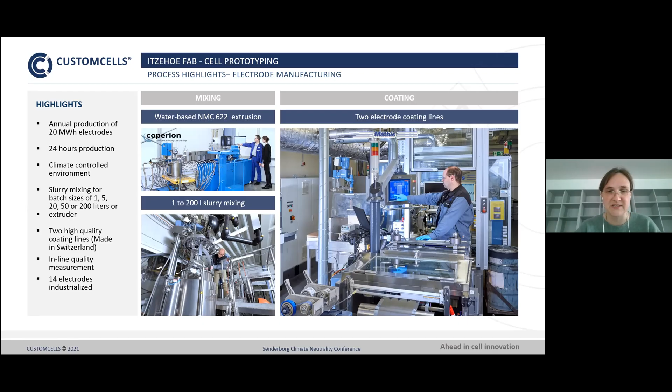Now the electrode is still wet. There is still some solvent or dispersant inside - water, or as I stated, the organic solvent - which needs to be dried. This will be done with IR drying or hot air drying. It should not be too fast, or you will have dehomogeneous mixing. So the good mixing that you have done in the step before will probably become inhomogeneous if you do that too fast, because the binder can migrate to the top of the layer. Or if it's too slow, then it will just not be dry. And because this is a roll-to-roll process, this would be quite messy, so it has to be done in the right way.

And here we have a nice video - I didn't know that. You can see it here, it's really very nice. There is the application, or the applicator here - I think that's a slot die - and you see here the layer.

You see here that there is the layer of coated material. It's wet, and there is a sensor that measures the thickness of the layer.

And here you can see the overall machine. There is the bare foil, here is the coating line. There is the IR drying zone, and there are 2 or 3 hot air drying zones. This is our cathode coating line - we have another for anode coating. And here, after inspection, there is just the winding again, and then you have a roll-to-roll process.

So after that, you have electrodes, and what you do with the electrodes is now build up a cell. There is also a very nice video film here - let's start here.

So we have a flexible pouch cell production. We can produce these, for example, these very large cells here, or very, very small cells, starting from 1 ampere hour up to 200 ampere hours - it really depends. And we can do this by hand stacking or by this production equipment, automatic stacker.

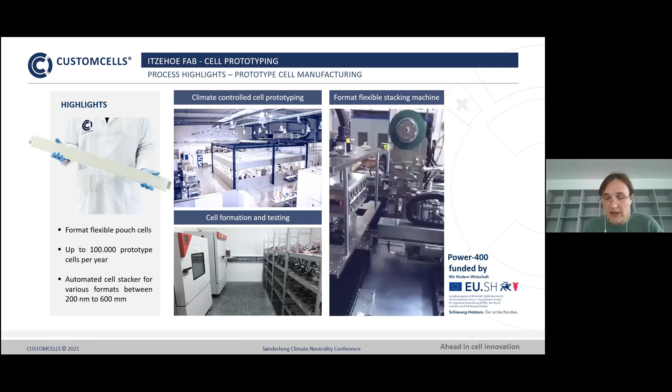After the electrolyte filling, the formation starts, where the cell is first charged and discharged. Here the SEI is formed, and then the cell is more or less finished.

In our production site in Tübingen, we have a fully automated process where we can build up high precision cells. This is an example cell, and there you see on the left side the high precision stacking in comparison to a commercially available cell that is much less precise in stacking. This also helps to gain higher energy density, because you can have more space filled with electrode and don't need to have that much of a safety margin.

This was a short overview of the recent trends in cell development and what Custom Cells is doing. And if you have questions, I'm ready to answer them.

Thanks very much, Daniela, for your very impressive talk. It's really great to see that this kind of production is still in Europe, especially in close vicinity to the big German car makers. I heard recently that you made a deal with Porsche, so congrats on that. I think this is really important, that we don't lose the contact and the knowledge here. I studied 26 years ago in Münster together with Martin Winter, and I'm very happy to see that this is continuing here in Germany.

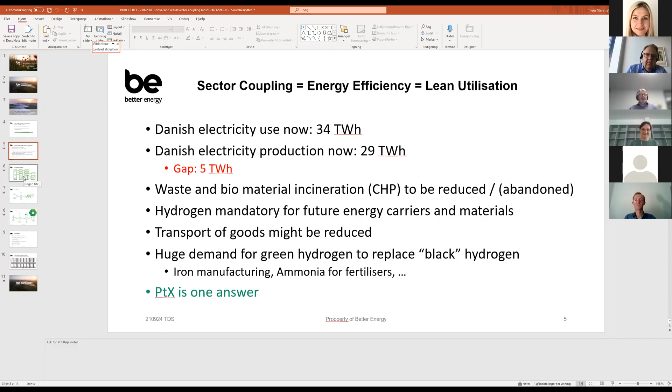We produce mainly through photovoltaic electricity, which we put on the grid, and we make power purchase agreements. That means a company can buy green power from us. It is through certificates because we have no direct connections, but then they can buy that, and we make sure that it is coming from the sun.

Then we will see us going into direct lines, we are close to doing that right now. We are also interested in EV charging because it seems our parks are in many places along the highways. So why not put up a charging station for trucks and who else is running on electric power? That's a natural way.

It's also easy to make heat and cooling, but there's not that much money in that. But we will come to do that through heat pumps, because we are not able to take heat out of the traditional power plants.

What to do about making hydrogen, which is of our interest, is electrolysis. That means we are splitting water into hydrogen and oxygen, and we can use that. The easy way to sell it is if we had a grid, and it gives a lot of meaning because in Germany the steel industry is screaming for hydrogen, and they are going to be forced to use green hydrogen. We see the same picture in other countries where we are active in solar business, in Sweden and also in Finland, where they are working a lot on getting rid of coal in the steel industry.

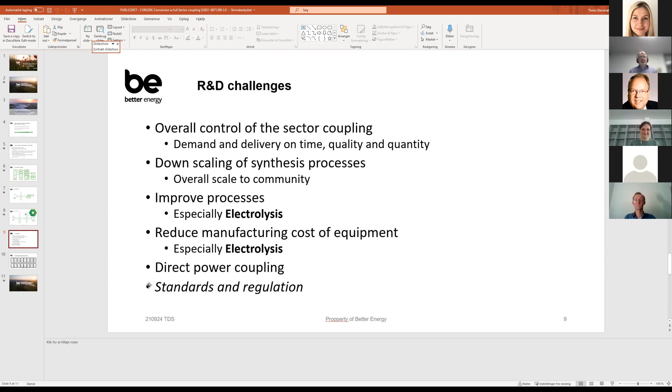So we have to change standards and regulation. Here it's regulation, to make the politicians understand that it is not efficient maybe to put all energy factories on the west coast, because in a sense we cannot use the other stuff being produced there. And standards are not established, so you cannot just buy an electrolyzer and tell the authorities that you want to put it there. It's simply not possible, because there are no fire rules established and stuff like that.

Then you could talk about financing. We were the first company in Denmark who made a photovoltaic power plant without any subsidy in any way - at the same time it was also done in Spain. That means it's not about where we are placed on the globe; there are other things having influence on the financing and the efficiency of making plants.

When we built the plant, it's now our own - they are under our own control. We are getting financed through real estate financing corporations, as you can see, and I think we were the first to do that in Denmark too. That means this is really bankable processing, where we have taken out a lot of risk to be able to do that. And this is some of the examples. The biggest plant is just these days getting opened - it's 207 megawatt peak, but that is the last one we have sold. It was sold to Bestseller, which is a clothing company.